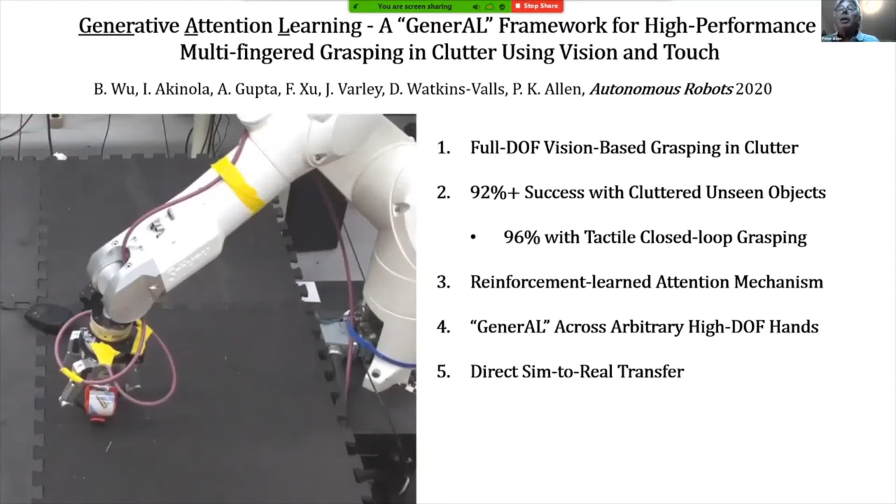We use a reinforcement learned attention mechanism, which we'll talk about, which lets us focus on what part of the clutter we want to attempt to grasp. And we've actually tried it on different arm-hand combinations, and it transfers very well. So it's a general method in that sense. And what's nice is it also does direct sim-to-real transfer. We do all the training in simulation, and yet real-world results are the same as simulation. There's no degradation. So let's talk about how this works.

Vision-based low degree of freedom grasping has become successful in terms of people being able to pick up lots of objects pretty well. These are just a few examples. However, this is low degree of freedom grasping. It can be limited. Parallel jaw grippers are limited in what they can do. Let me go back. In this video, you can see a triangle, which is a pretty simple object. A parallel jaw gripper can't do it. We made the Barrett hand into a parallel jaw gripper there, because you can't really get on each side. There aren't opposing surfaces.

Top-down grasping is another limitation for most of these other methods. And here you can see, because there's a depth on top of that little Chicken Little, it can't get to it. So you need a grasp that doesn't necessarily have to come from the top down. And so reinforcement learning of full degree of freedom grasping in simulation can transfer to the real world with high fidelity. So here you can see with a multi-finger grasp, a triangle is not a problem. We're able to get onto the sides and grasp. And we can also do side grasps, not just top-down grasps. So this is really increasing the scope of what you can grasp.

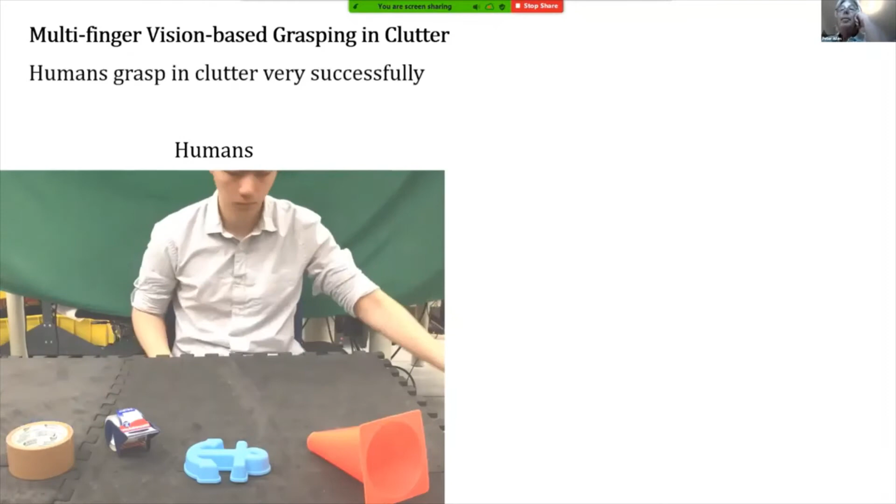How do humans do this? Well, humans basically find what they want through attention. You can see that every time, this is Bohan Wu who wrote this paper with us, every time he looks, he's attending to where he wants to pick up using vision. And what we want to do is the same thing with a robot. We want a robot in a cluttered scene to look at things that are important, focus in on them, and then find the right grasp. And that's what GenerAL, the work we're talking about today, essentially does. You can see here it's decluttering this table very nicely. And we'll show you in a minute that it's attending to each object individually as it does this.

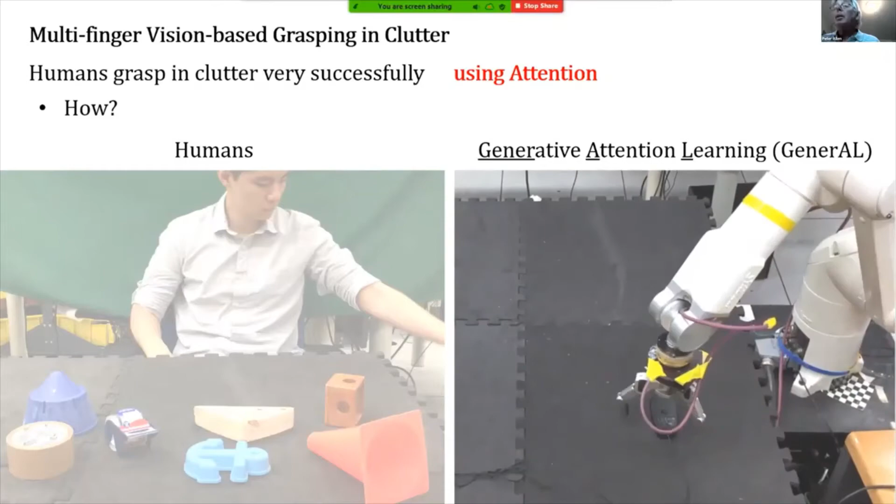So how does this work? Well, we take a cluttered scene, take a single depth map image, and then we have a 4-branch CNN with feature pyramid blocks. So basically we have position, attention, orientation of the wrist, and the fingers. The position gives me the point of attention, where we want to look in the cluttered scene. And from the attention, we have to decide whether we want to zoom in or grasp. So maybe we can see enough to do it, or maybe we want to get closer. And what we do then is figure out the zoom scale.

And if we want to do that, we zoom in and enlarge the image, get more data from it, and try this again, zooming in a number of levels. And eventually we'll do that to the point where we're ready to grasp it, when we think we've zoomed in enough. Then for the grasp, we figure out all the other positions, the wrist position and the grasp angles for the hand. These are all learned CNNs trained through simulation. We'll show you in a minute. And from that, it can then pick up the object. So what's the action space for this system?

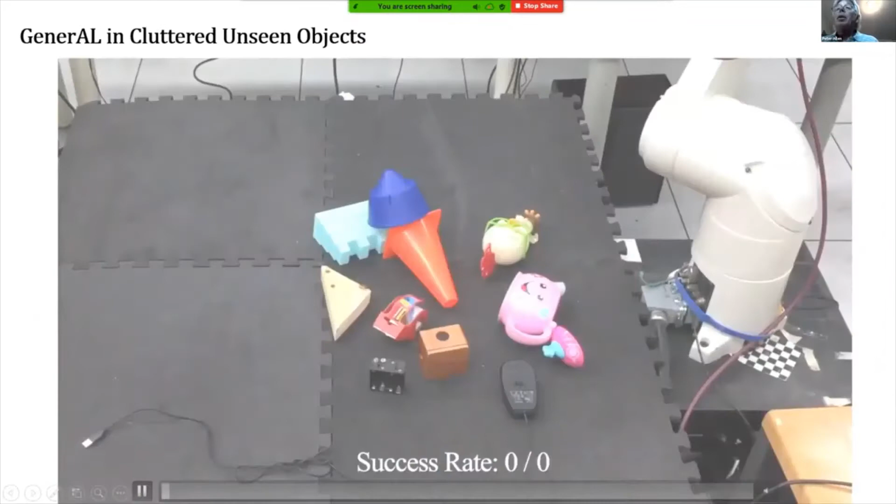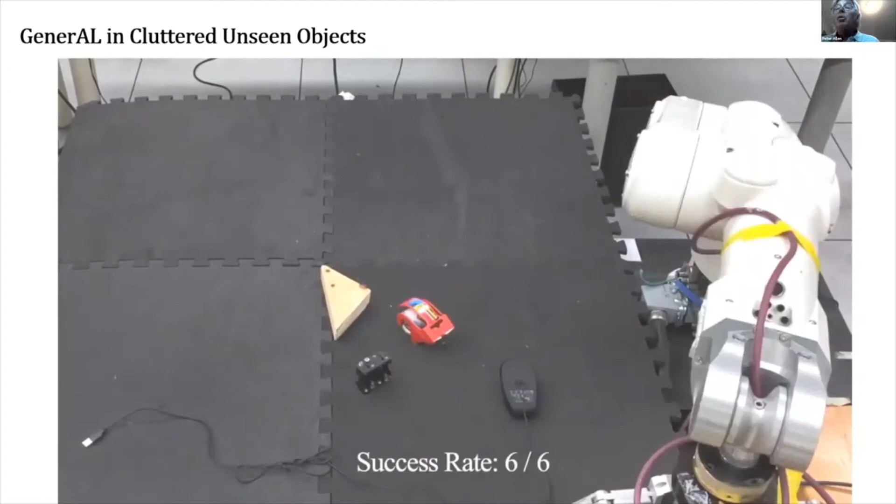So here's some video of it. You can see it working. And it attends to each object by zooming in on it and then figuring out how to grasp it through the CNN that it's learned. And again, it's a multi-fingered hand with full 6 degrees of freedom. Even though a lot of these grasps look top down, they're not exactly top down, and it turns out that makes a big difference.

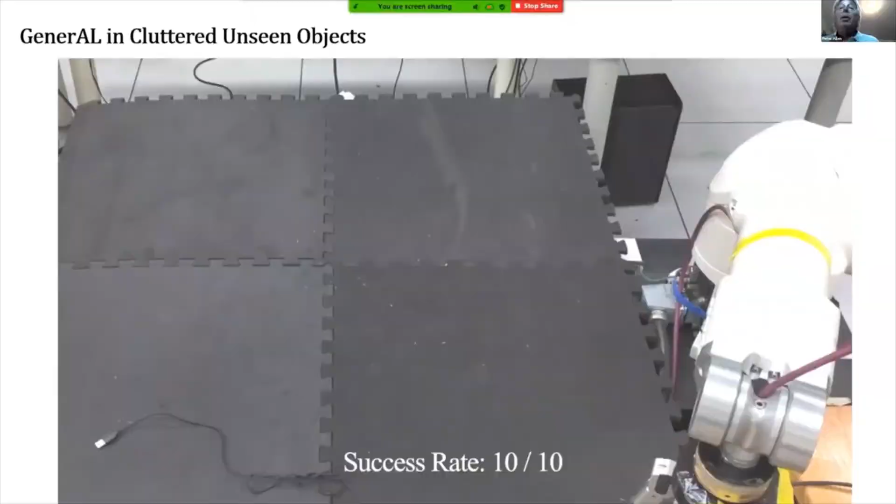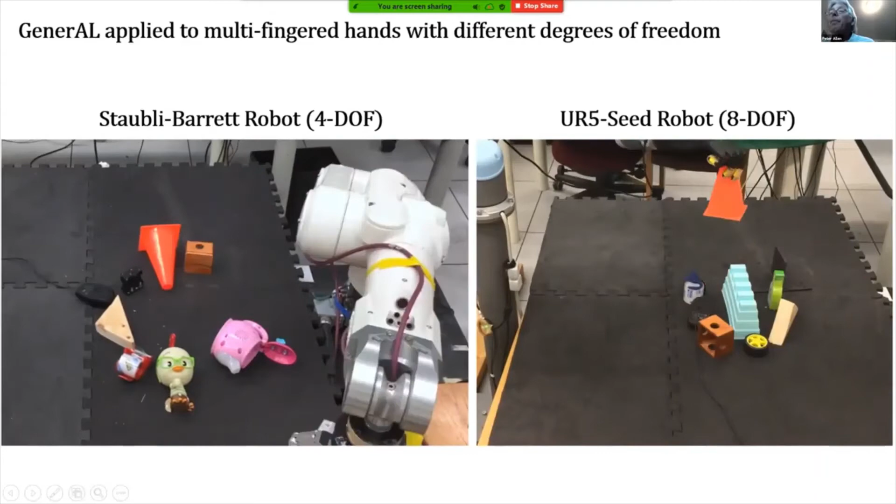And what was really exciting to us, once we got it working, we had a Barrett hand with a Staubli arm. We said, well, if it's general enough, can we use it on a different degree of freedom hand? And so we did. We used a Seed hand, which is 8 degrees of freedom, not 4 degrees of freedom like the Barrett. And we put it on a UR5, not the Staubli, and ran the system again.

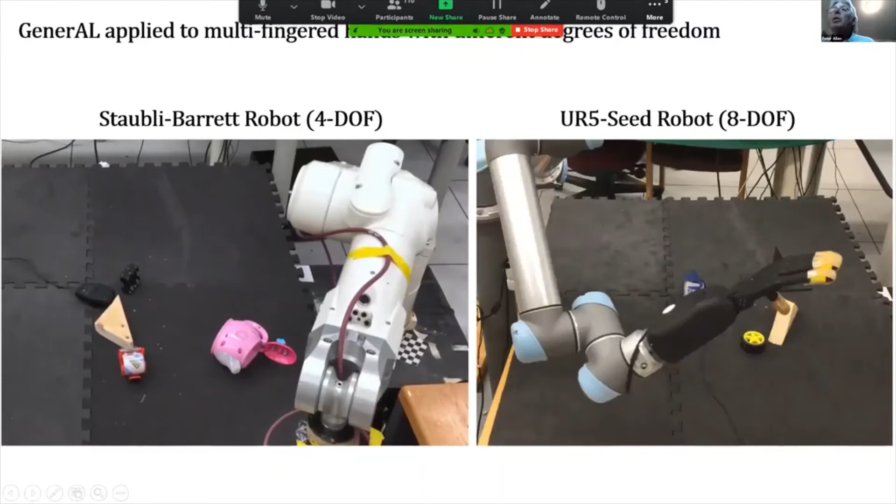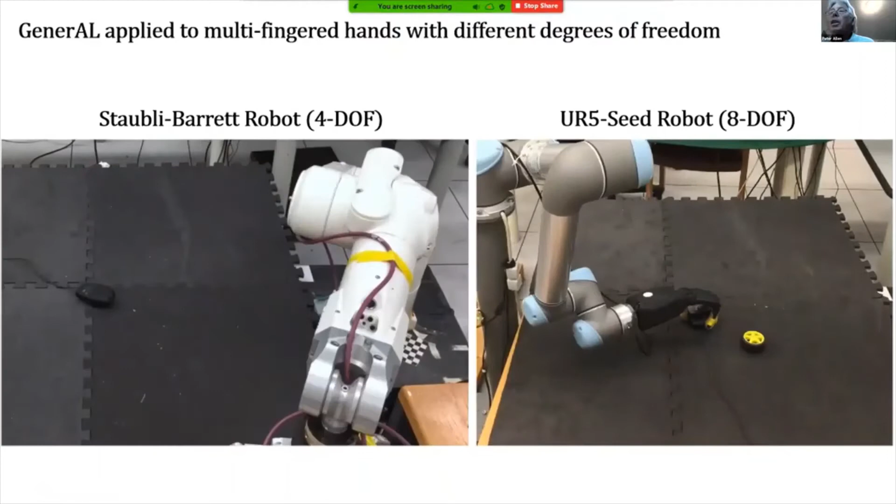And you can see it's working just as well, even though we have a different set of kinematics, a different set of finger joints, etc. And the training was the same. We just have to train for more parameters in terms of the fingers, but it worked just as well. So as you can see here, the performance is almost identical. UR5 did a little better, mainly because it has a little more ability to get into nooks and crannies for cluttered scenes. And overall, it's a 92% success rate, which is pretty good.

But there's always a but. Where is that 8%? Why don't we get to 100? What's going on? Where does it fail? You can see here are two failure cases where, in this case, there may not be enough friction where that grasp is. In this case, similar, or maybe calibration error, probably most likely hand-eye calibration error, where you're off by a little bit with open loop grasping.

We want to do better. So how can we do better? Well, we want to finish the last mile of this race with closed loop grasping. There's been a lot of work in closed loop grasping, but most of it has been with top-down grasps only, a low degree of freedom hand like a parallel jaw gripper, or single isolated objects, not clutter. So we want to try to get around all these limitations of closed loop grasping.

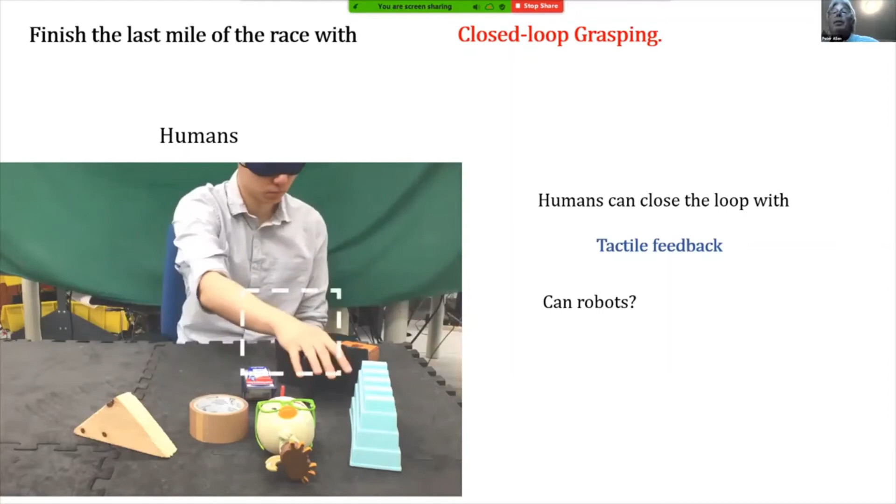Can robots do this? As you can see, he's got his point of contact, and then he's going to adjust the hand based upon tactile feedback. And that's what we'd like to get a robot to do. So once he gets to a search space, gets some contacts, he can adjust them to find what he wants. So that's not a good grasp, but he can improve it through an adaptive method.

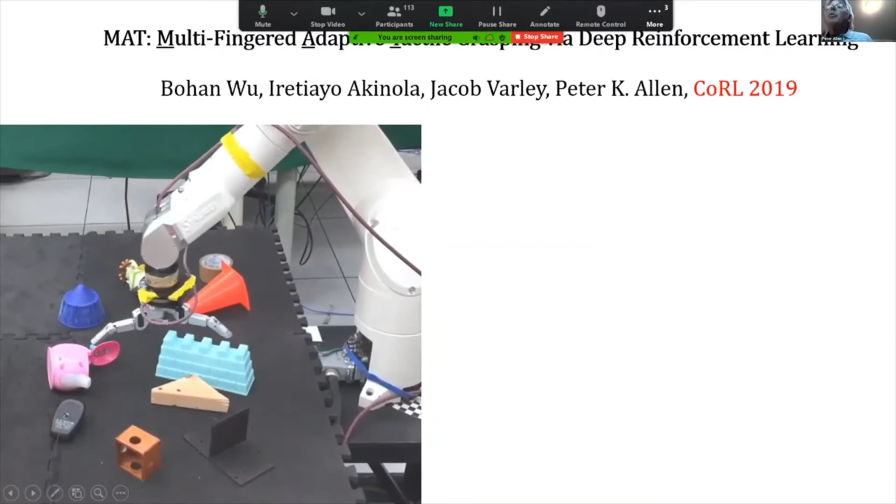Here, that initial grasp was fine. Now he's searching. That would be a vision system that tells him about where it is, and then he can adjust the grasp and do it. So this is work that we presented at CoRL 2019 on multi-finger adaptive deep reinforcement. And this is closed loop grasping using tactile only for the sensing.

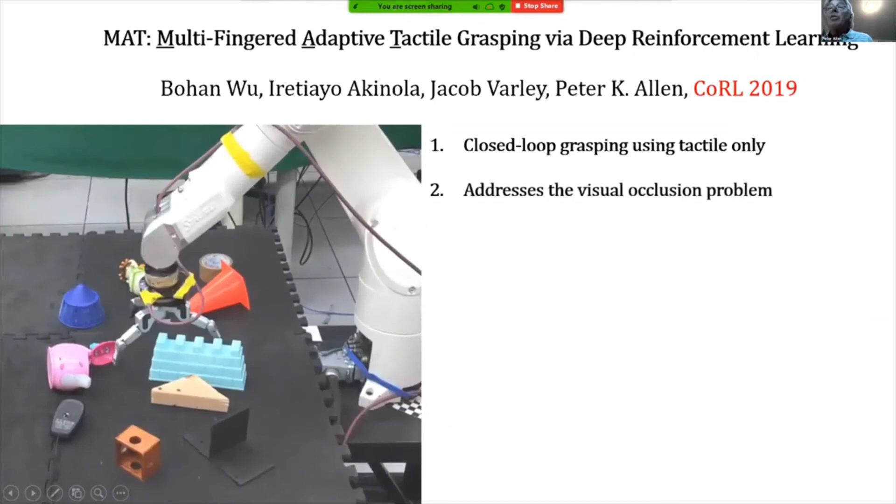It addresses the visual occlusion problem. It's robust under calibration error, and we'll show you that. It works with cluttered unseen objects. It's multi-fingered with full degree of freedom poses. And it's really a performance booster to a vision grasping system. So you can think of it as, take your vision system that works pretty well, gets 90%, then when it has a failure mode, you can immediately go into that.

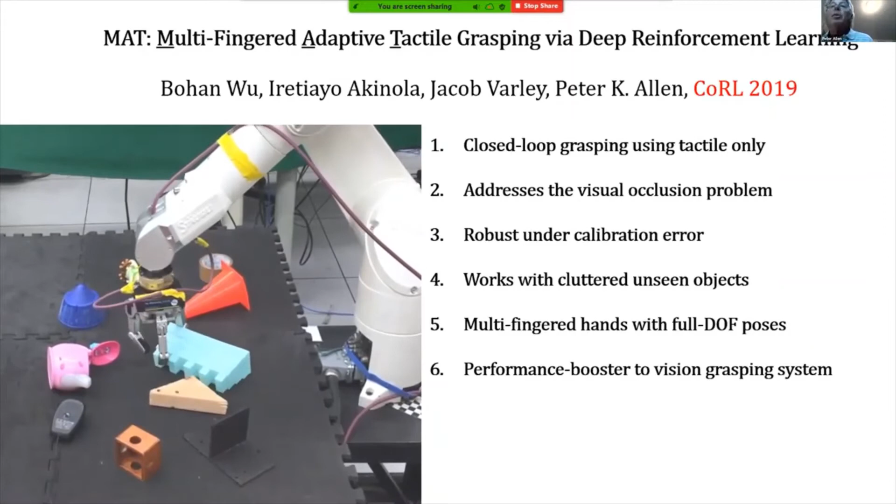And we'll get binary tactile contacts. Again, we're only using binary. We're not trying to use full force or anything like that. Joint angles and tactile contact relations. And we're putting this into an action network to see what we should do. And we have choices. Should we reopen the fingers because it wasn't a good contact? No. Should we lift it? Maybe we want to adjust it. No. And then in this case, well, maybe we'll close the fingers a little bit to see if it improves. And if the answer is yes, we'll do that.

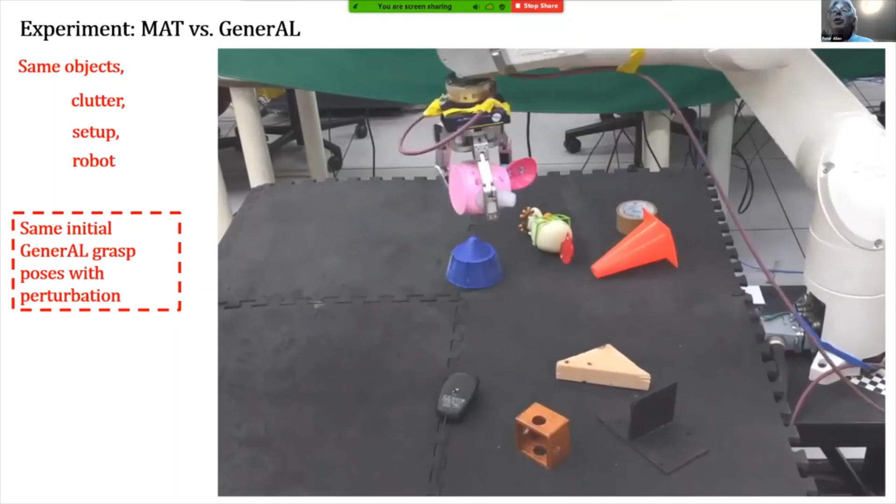So now we go to MAT, where it's going to try to find a good grasp, and you can see it does a very nice job. Some of these grasps work right off the bat, but if they don't, then we can do the readjustment using MAT, as you can see here. It slides out a little bit, it's perturbed, but we're able to use the tactile contacts to bring it back into play. Again, same thing here. Keeps looking, finally finds it.

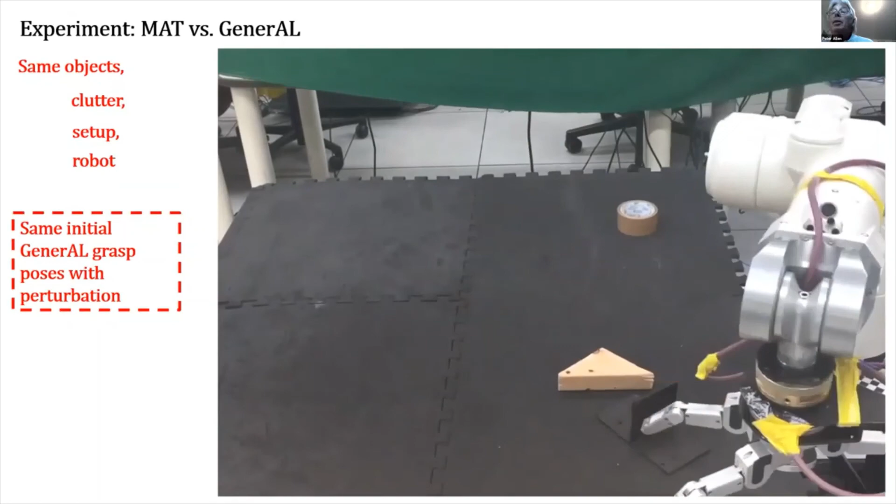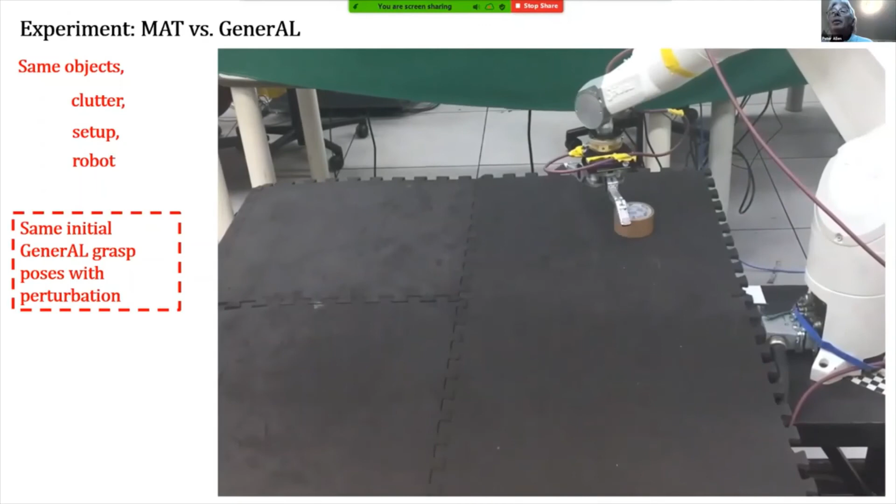What we did is a comparison against the baseline of GenerAL, which is a closed loop system with a single object only, not clutter.

Okay. Yeah. Hello? Yeah.

Yeah. And you can see the improvement is pretty good here, especially when you get to 2.5 centimeter grasp perturbation.

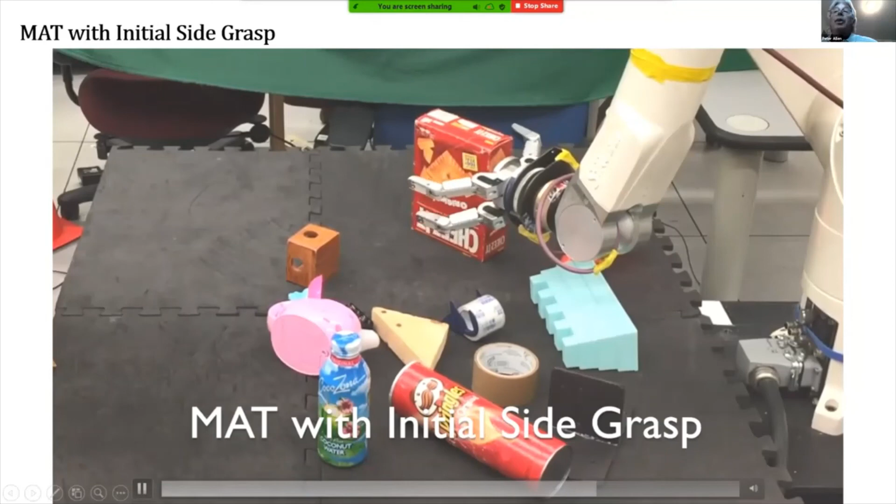So the key takeaways: full degree of freedom vision-based grasping in clutter, 92% success rate with cluttered unseen objects, 96% with tactile. We use reinforcement learning. It's arbitrary across high degree of freedom hands, and it does direct sim-to-real transfer. It's closed loop, adaptive tactile feedback at the end.